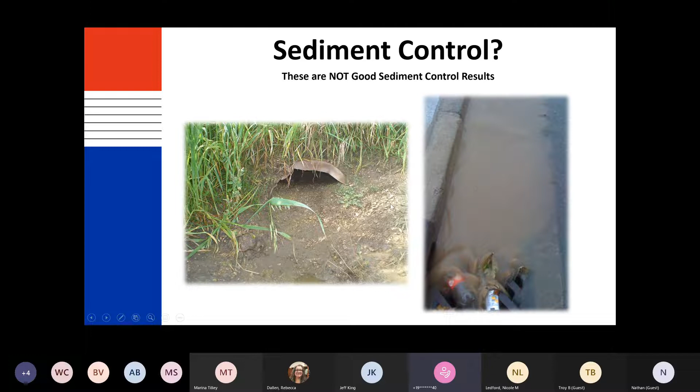But the goal here today is we want to try to learn from our mistakes, right? Learn from other people's mistakes too. So if you look at this particular picture here, you can see this runoff here is completely brown and sediment laden. So what that means is they don't have any kind of BMPs upstream to the top left corner. So every bit of that contaminated runoff is coming down here and going to be going into the water system.

Now, there is a difference between erosion control and sediment control. Erosion control works to prevent your soil from moving off of your site, so it keeps it in place. Your sediment control works to remove your soil particles that have eroded and are being moved by the water.

One of the things that we really stress with municipalities we work with, civil engineers, and other project designers is that if you've got a proper erosion control plan, that can greatly reduce the need for sediment control. At least take it down to the bare minimum of what you're going to need.

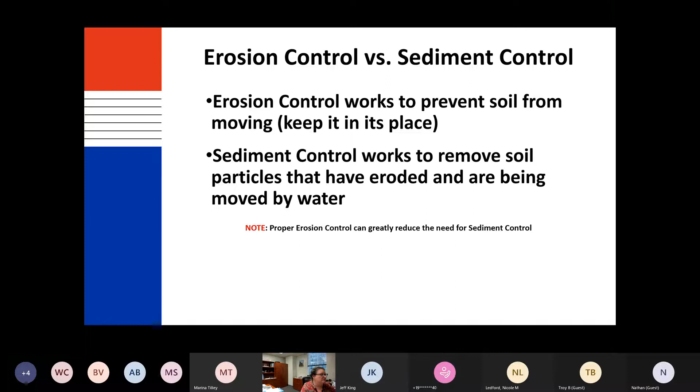This is an example of exactly what I just talked about. So this site here actually doesn't have any kind of erosion control BMPs here upslope. Unfortunately, they've had some rain events, and now look at your ditch here. It's completely full of sediment. It's completely full of trash.

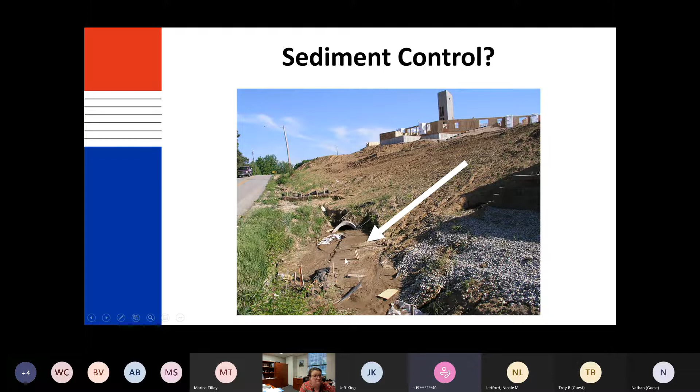It looks like here they did, however, try to use some different sediment control BMPs. It looks like a combination of silt fence along with hay bales, and then you see the remnants of some silt fence here. So what I can tell you is if they had had a proper erosion control plan here on this slope, you're not going to have this kind of result here in this channel.

So what is filtering versus damming? Filtering products are going to allow you to have a flow rate that's greater than 35 gallons per minute per square foot. What they do is they filter by allowing your contaminated runoff to go through the BMP, or the matrix of the BMP, and it also helps provide some velocity dissipation when your flow rate is exceeded.

Now, your damming products, those are going to give you a maximum flow rate of up to 35 gallons per minute per square foot. These are typically going to be dense products, and you're going to be able to see a few of these as we move into the presentation. They're typically just designed to pool the water or back it up. But unfortunately, in the process, they can redirect the water flow and the energy during those concentrated flows.

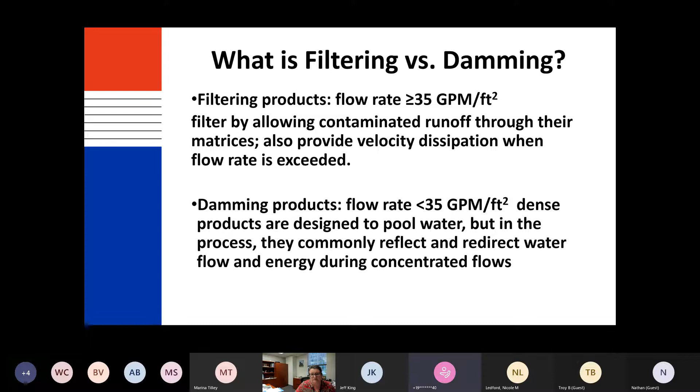Your typical straw wattle or straw-based products, those are what we call in the industry non-engineered fibers. What that means is they're a byproduct of something else. They're not cut to any specific length or manufactured in any specific way. So in order to meet the diameter requirements for this type of BMP, you have to put a lot of straw fibers into that tube. And unfortunately, that makes that device very dense.

Now, this is the other side. This is the Aspen wood fiber sediment log, which is not a dense device. This is what we call an engineered fiber inside this device. That means it's manufactured in a certain way for a specific purpose. So I'll just go ahead and show you.

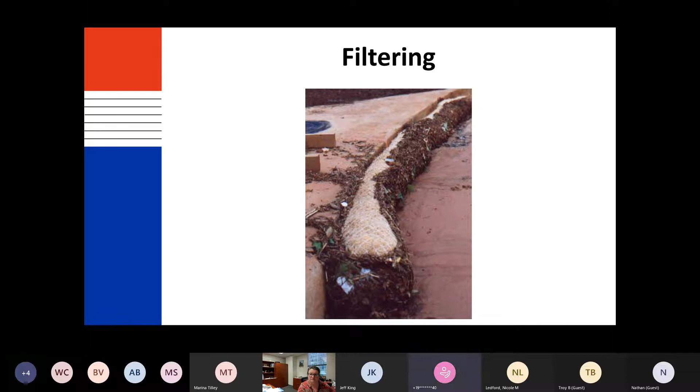So back in 2014, there was a study that was done by Auburn University, and they've got some fantastic research on ditch checks, and these ditch checks are commonly used on a lot of construction sites around the country and around the world for that matter. One of the things that they discovered is that whenever they included an underlay or a geotextile fabric, so that's that black fabric or filter fabric, it reduced the potential for the scour or erosion underneath the device. And the reason why is because it maintained the interface between the device and the channel, if you will.

Their data does confirm that dense products can be successful in large-scale testing conditions by creating longer subcritical flow areas. So this here is going to show you the spacing between the devices, nature's pools and riffles. So you've got a good amount of space here, so it's allowed to filter through this device and it pools back behind this one, pools back behind this one, and pools back behind this one. You can see the flow from your top right down to your bottom.

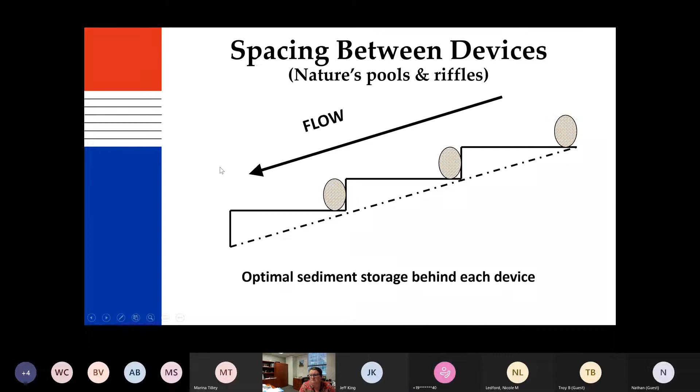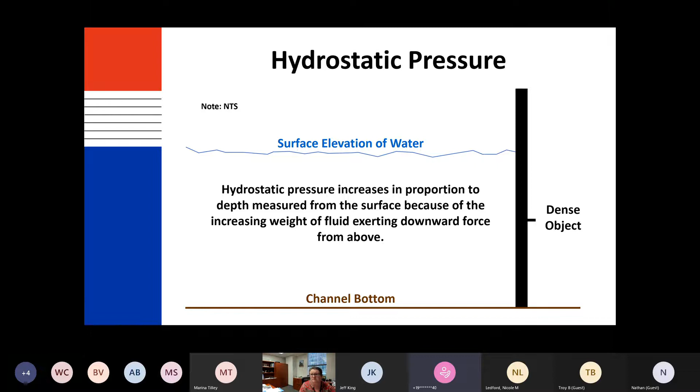Jeff, do you have any pictures showing in the field where you have that filter fabric underneath? Okay. I'm not sure in this presentation, to be completely honest. I have some areas where they didn't include it, and you'll be able to see for sure. I do know for sure I have that. It's been a minute since I've done this one, so my apologies for not knowing that off the top of my head. But I can always try to find those photos later on and provide those. Cool, thanks.

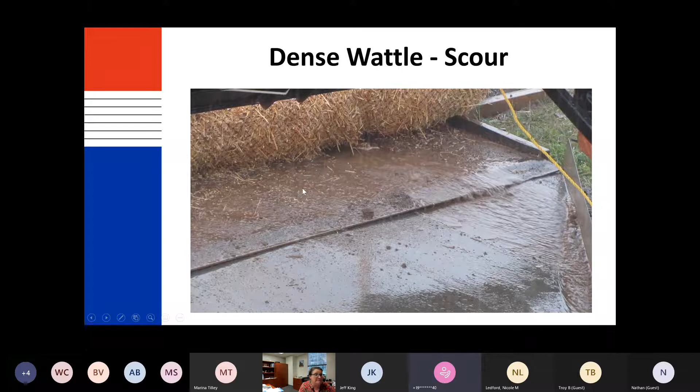So dense wattle here, you can see the scour and just the amount of sediment-laden water here backing up. So this is a common BMP that's used out in the field. This is silt fence. This is considered a dense object. And here is a real-world example of what I showed you 2 slides ago where the scour path goes underneath. Also notice back behind here, there's little to no vegetation because the water pooled long enough for it to scour underneath, and now you've got a large rill here in your channel. So that means the integrity of your channel is null and void at this point.

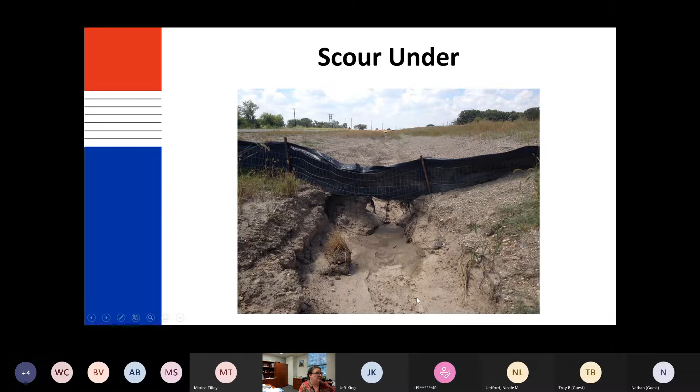Another example of a typical BMP that people use that falls under that dense category is those hay bales. So you can see here, they've got 2 rows of the hay bales. And then the water diverted its path underneath the device, scoured underneath, and went along on its way. More is not always better. Here you've got more layers of the straw hay bale, and again you've got more rills underneath the device here.

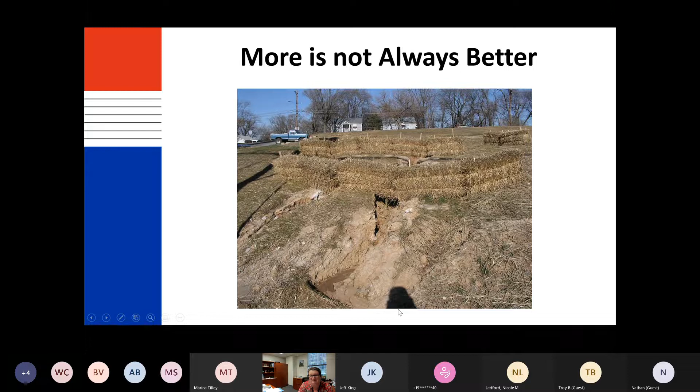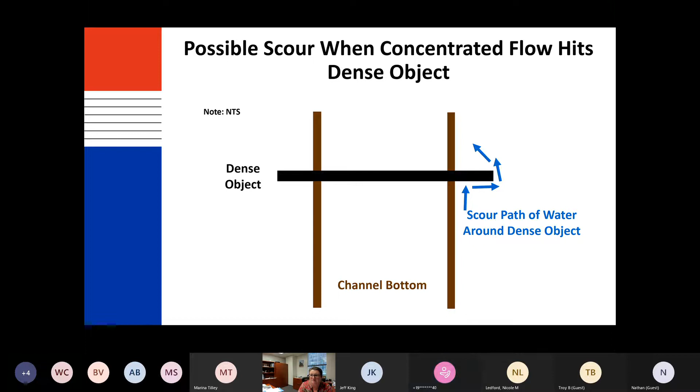So the other potential issue that you have is scour that goes around the dense object. The brown lines are going to indicate your channel. The black indicates your dense object, and then the blue arrows indicate the scour path of the water around the dense object. The red here, this actually was taken out around Gainesville, Texas, which is south of y'all by about an hour and a half, 2 hours maybe, on the other side of the Oklahoma and Texas border. You can see here the path of the channel was supposed to go this way, and it was supposed to go through the rock check dam or dense object here. But unfortunately, the path of the water and the amount of the flow caused the water to redivert and scour around and just go around the device.

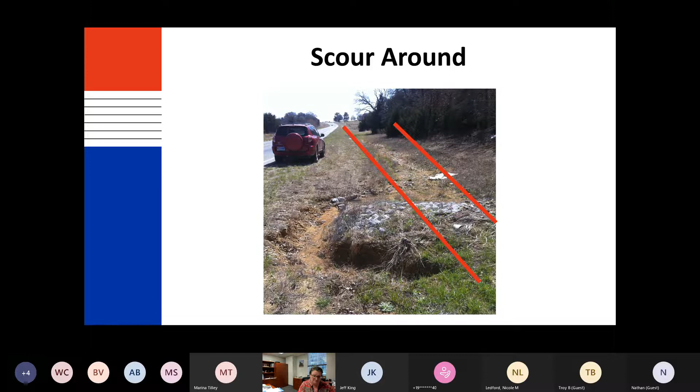That's where installation comes in. Your installation is going to be your key. When you have these devices in your channels or your ditches, you want to make sure you've got 3 feet of space between your normal pool and the end of the device. So you see that's where the red arrows are indicated.

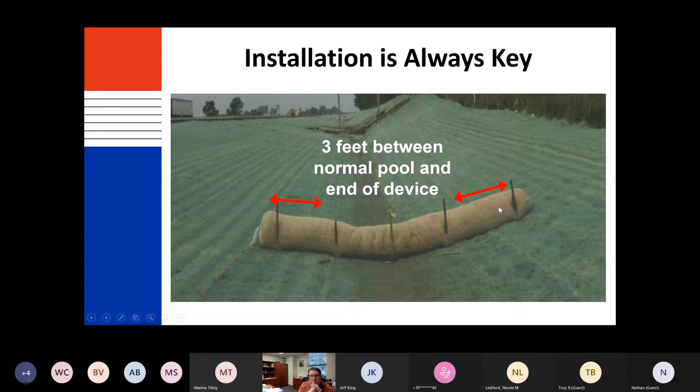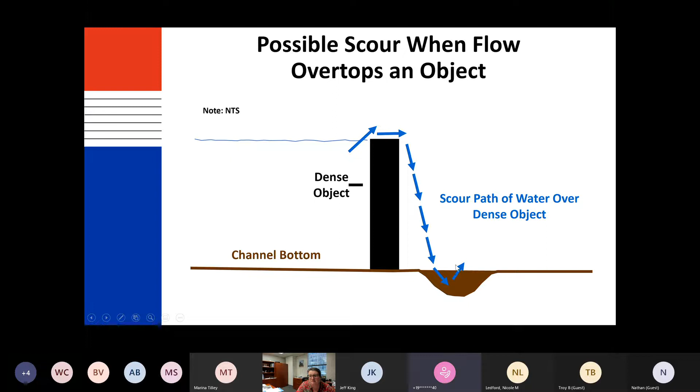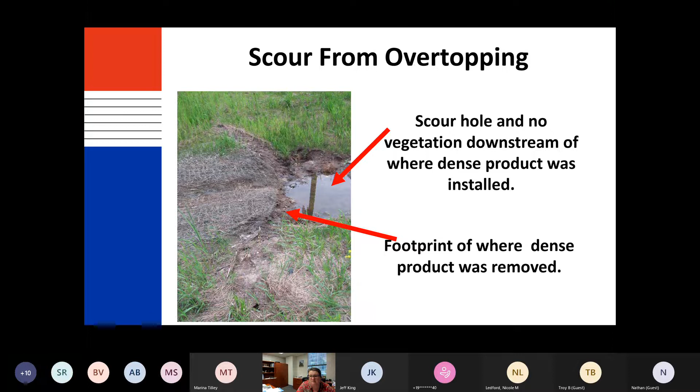Another example. This is the same area over in that Gainesville, Texas area. So you can see here the water came from the top of the photo, hit the dense device, and just scoured over the top of it and ate this rill right here, right smack dab in the middle of this ditch. Just to put into perspective here, this scour hole over these rock check dams, and these are large rocks, I would call them almost boulders if you ask me. But this is about 3 feet right here. So this is a very, very deep scour hole.

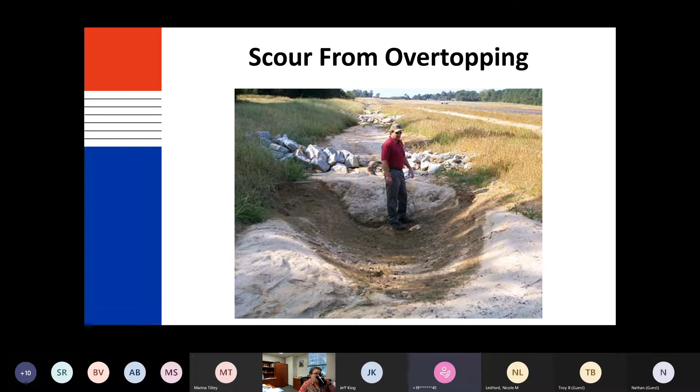Because at the end of the day, the water is going to go somewhere, right? I think we've proven that when I've shown you these examples. It's because there's enough pressure and force from that water and from that flow. That water is either going to, like I said, scour underneath the device, scour over the top, or scour around the side. It's not like it's going to hit the device and just stop if it's a concentrated flow.

So unfortunately, with the underlayment fabric, that does prevent vegetation establishment. Typically in these projects, you want to have some kind of vegetation, and unfortunately, those fabrics don't really allow for that, unlike an ECB or erosion control blanket or even a TRM. Another thing with the damming products is it does create ponded water, and that reduces your vegetation establishment as well. And then, again, as I've mentioned earlier, bare soil in your ponded areas introduces a weak spot in your channel, and that's where erosion could start and create even bigger issues.

Jeff, do you have any good solutions for those things? Like different types of products? Yeah. Absolutely. Combinations of things that might work to help some of those things? Oh yeah. Well, like I said, you can use those rock checks, and you would want to use an underlayment fabric underneath it. But if you're wanting to establish vegetation, what I'll be able to show you here in just a little bit is a filtering type of product is going to be your best bet for being able to do that. And vegetation is nature's erosion control. So that's what you definitely want to look at trying to get. In my opinion, you want to have as much vegetation as you can.

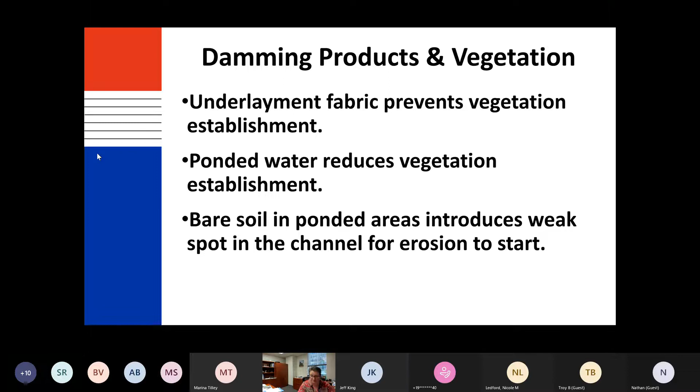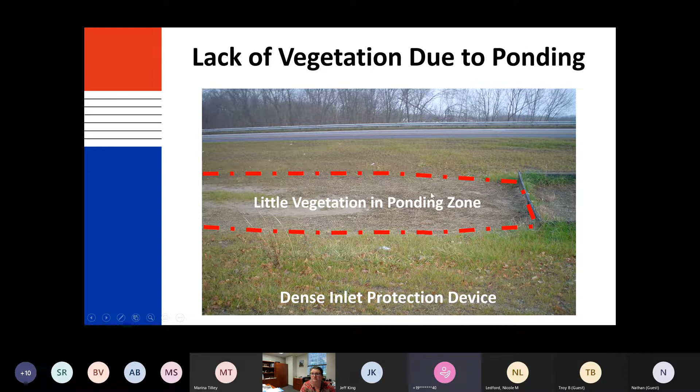So see here, here's a lack of vegetation. This is due to the ponding back behind where the dense device is. So you can see here, that's a bare spot. And there's your dense inlet protection device there. So if the water was able to flow through here and filter into the inlet, then you're not going to have ponded water that's going to kill any kind of vegetation that you got there.

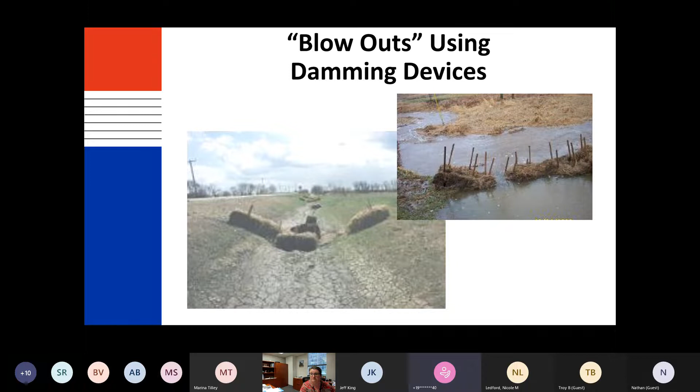The other potential is to have blowouts with these devices too. If the flow is fast enough and there's enough force, something like a hay bale is going to blow out. Or on a silt fence, you might see the fabric all tattered and pulled off of the metal fencing or away from the wood posts. There are applications for the damming products though, especially for your temporary sediment control channels. Again, you want to make sure to include underlayment fabric to prevent that scour, but they're good for sheet flow applications. They are good for perimeter control, and for your slope interruption as well.

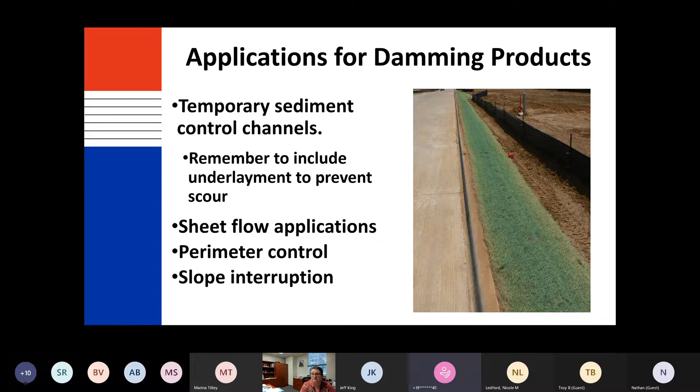So now you're going to get a chance to look at what it does through a filtering device. When the concentrated runoff flows down through a filtering device, you can see the channel bottom here is brown just like before. The gray indicates the filtering object, and blue is the path of the water. Here's a look at a filtering device. Actually, let me go back to that just a second. This is supposed to be animated. I apologize that it's not, because it was supposed to start at the bottom. That's all right. We'll move on.

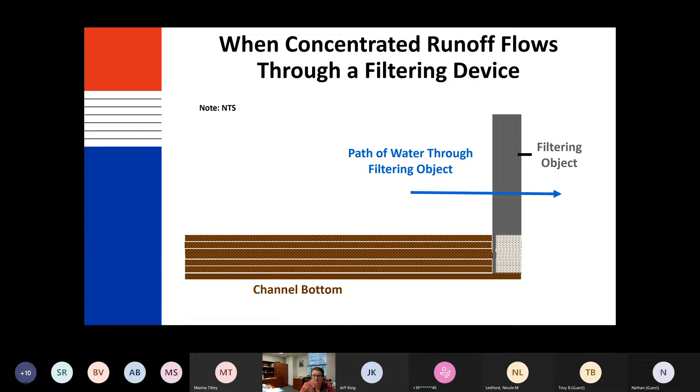Hey, Jeff. Yes. No. Sorry.

So around Oklahoma City, we see a lot of rock bags being used around storm drain inlets. How would a filtering device help with that as compared to a rock bag? Well, a rock bag is going to be considered a dense device because rocks are hard, right? So it might filter a little bit better than some of those rock check dams, but it's not going to filter as good as some of these natural fiber devices or some of the other things. But yeah, you could definitely use it.

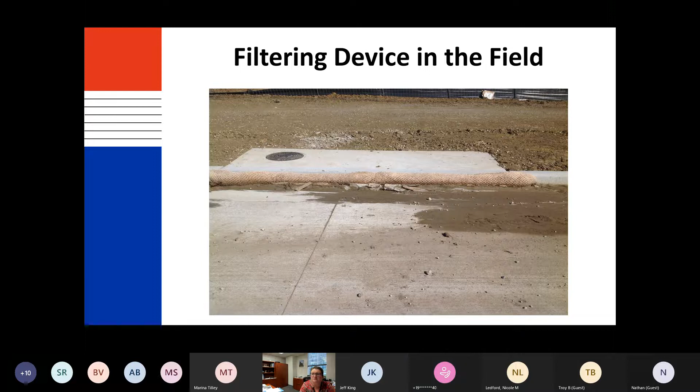Excuse me, I had to get a drink of water there.

Jeff, in the previous slide, did it stop all of the sediment? I mean, it stopped a whole lot of it. The water there looks dark, but I'm almost certain they would not have put that in the presentation if it had a bunch of sediment still in it. So yeah, I'd have to say that it stopped a very, very large percentage of the sediment from getting anywhere near the end of this channel.

Cool, thank you. Because also, look at it like this: if you design a project like that, you've got a couple different fail safes, because not only do you have this device here, but you've got it lined with a blanket, and especially the Aspen fiber gives you a higher Manning's n, or what we call a roughness factor, and that also catches sediment.

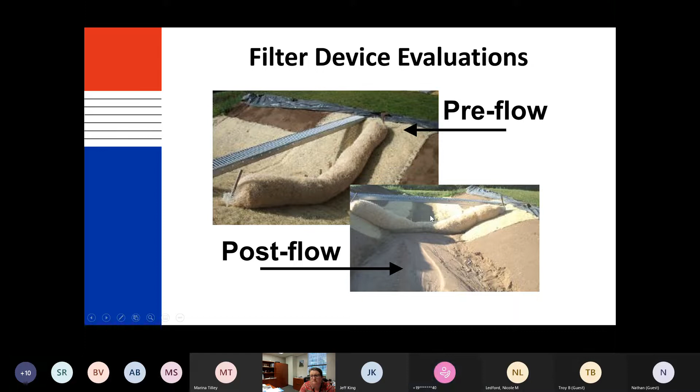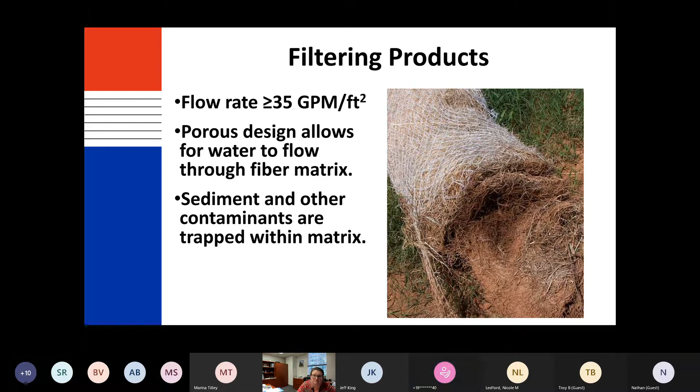So does anyone have any other questions to this point? I don't see anything in chat. If anyone would like to type in chat or unmute yourself, feel free to ask. Yeah, this is Mike Cliff with BNSF Railway. I've got a quick question. I missed the first five minutes of the presentation. Is there going to be something with part numbers or a better description of what these products are so I can give them to somebody else?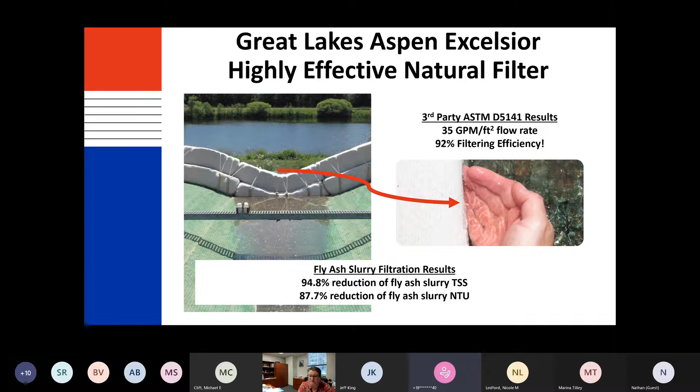So independent research has shown that the Great Lakes Aspen Excelsior fibers do filter out contaminated runoff. They do remove hydrocarbons, which are typical components of your asphalts, your fuels, your oils, and your greases. The source for that is Boving and Zhang in Chemosphere 54. I can provide that as well, but better than that, I can actually show you.

Just a little bit of background here. This video and I believe the next video are on our YouTube channel. We did these videos around the time of the BP oil spill in the Gulf of Mexico, and they were actually featured on a couple different cable news channels during prime time. The other thing is the Great Lakes Aspen Excelsior fiber is an EPA approved oil sorbent. So let me show you. So the point is, actually, I'll get to that here in a second.

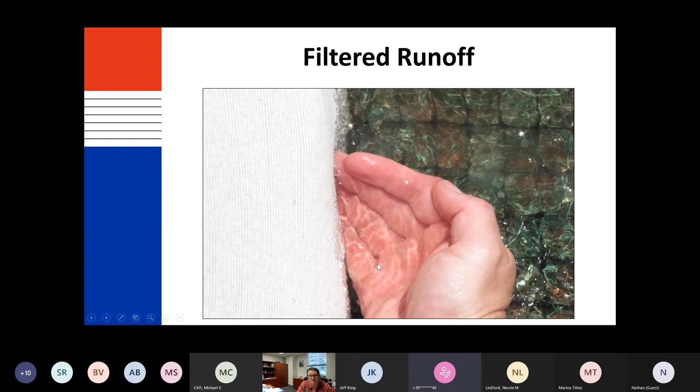So there's a lot of different applications for your filtering products. So your temporary or permanent sediment control channels. The porous matrix usually translates to a flexible device. That was the other thing that I did not mention earlier. With those damming devices, specifically like the straw wattle, that's a brittle device and not very flexible at all. Whereas the Excelsior sediment log is not brittle and it is flexible. And that's going to allow you better intimate contact with your subgrade. They are good for sheet flow, perimeter control, and slope interruption.

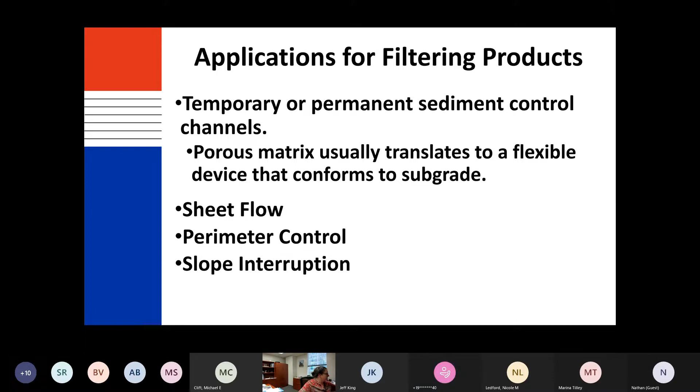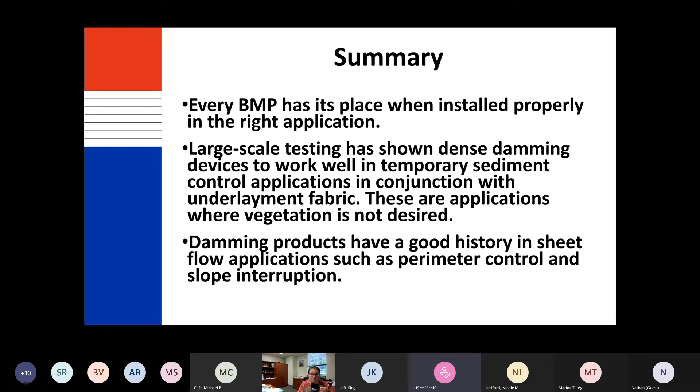So just to summarize, or if anybody has any questions at this point, let me know. But to summarize, every BMP, including those dense devices, has its place when installed properly for the right application. The large-scale testing has shown that those dense damming devices work well for a temporary sediment control application, but that is in conjunction with that fabric. And these are applications where, again, you are not wanting to establish vegetation there. And again, the damming products do have a good history in your sheet flow applications, such as your perimeter control around your sites and slope interruption.

But the one thing I want to make sure that y'all understand is that these two types of devices don't function or perform equally in the areas of concentrated flows. There's a lot of hydraulic challenges that are created if you use a damming device without an underlayment fabric, especially in the permanent channelized flow areas where you're trying to get vegetation. Your filtering devices are designed to dissipate the velocity of the water or the concentrated flow. And you want to filter out any kind of contaminated runoff, and also encourage vegetation establishment because, as I mentioned earlier, vegetation is Mother Nature's ultimate erosion control BMP.

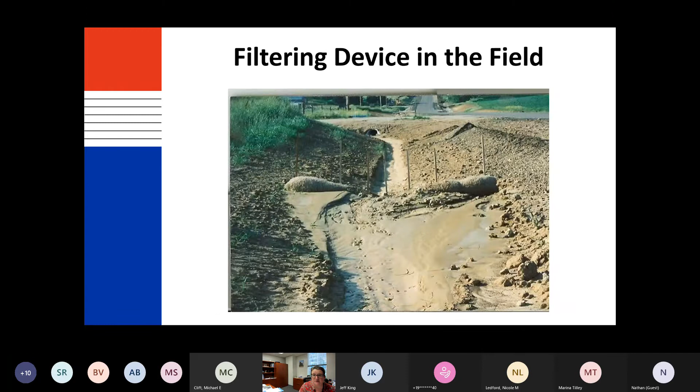Cool. Since we had a couple people show up a little bit late, would you mind also showing the demonstration towards the beginning, where you show them pouring the bucket of water over the two different types of products, the filtering and the damming products? Absolutely. Those are also on our YouTube. That's one of my favorite videos to show as well.

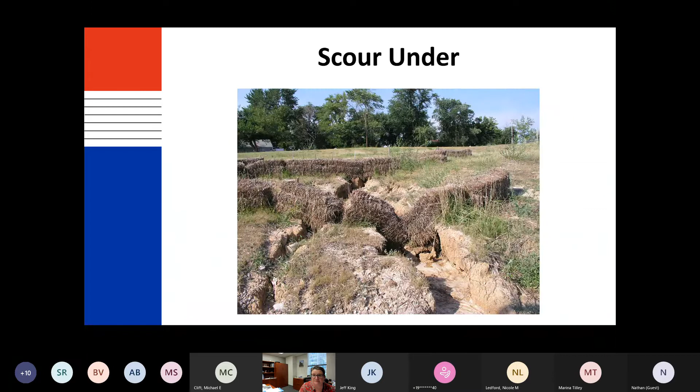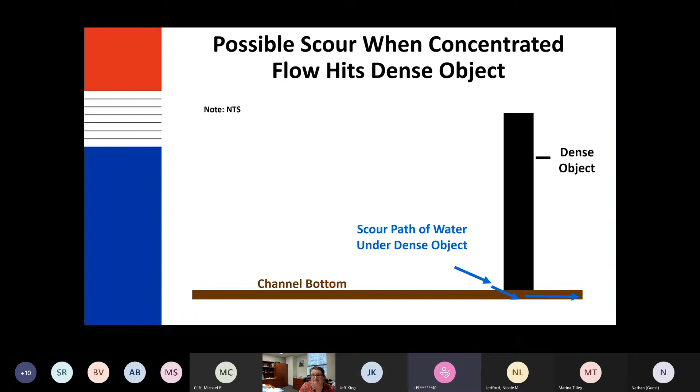Normally that's all in one video, but I actually had to record this presentation for the large International Erosion Control Association trade show that was in Minneapolis, I believe, this last year, but I couldn't go, so it was a virtual presentation. So one, it's non-branded, but two, we had to separate out some of these videos. So that's why it's in the format that it's in, but sure, I'll show that to you.

All right, so what this is going to demonstrate is a damming device is going to be a brittle device, a dense device that is going to redirect your sheet flow of your water. And these straw wattles that a lot of people use have non-engineered fibers on the inside, so they're not cut to any specific length. So you're just basically cramming a ton of fibers into these nets to meet the diameter requirements for the straw wattles.

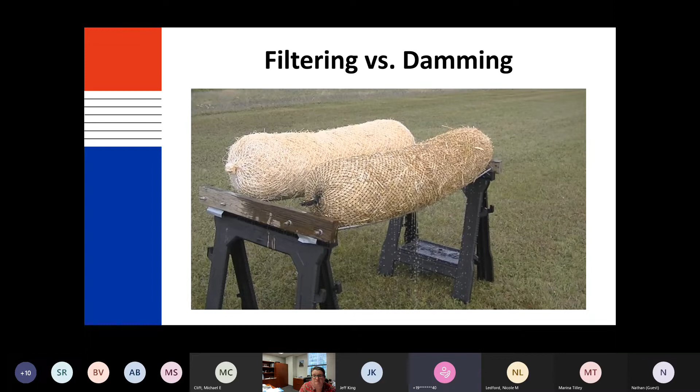So in comparison, a filtering device, specifically this one that has engineered fiber in it, is not brittle and it is not dense. So you can see here, when he pours the water over the top of it, it actually filters down through the device, which is going to alleviate any kind of scouring issue that you might have. I should have probably pointed that out earlier too.

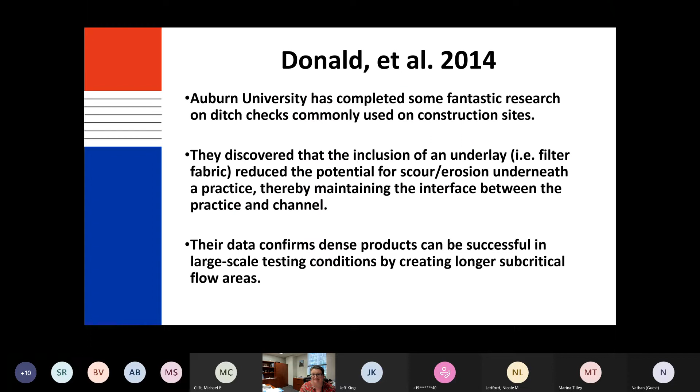What else? I think that's really cool. And, like you mentioned, the City of Oklahoma City cannot officially endorse any specific products. That's why we always have to have the asterisk statements that we don't recommend or endorse any specific products. But we still like to have webinars to show people some of the different products that are out there, so that way you can be armed with knowledge, because knowledge helps everyone.

Each site is unique, whether it's an industrial facility or a construction site. They each have their own challenges, and knowledge is power. So seeing some of these different things in action, I hope it helps inspire people to do some research and see what's out there and see what will work best for their facilities.

Well, you're absolutely right. Knowledge is power, and it is important for people to know what other BMPs are out there, because unfortunately, there are still some people that will copy and paste a specification that's 25, 30 years old. The technology in the industry has evolved significantly since then. At this point, a lot of states, for example, are not allowing those hay bales. I'm pretty sure Oklahoma doesn't really allow those. Yeah, that's an outdated BMP to use. There are way better BMPs available right now.